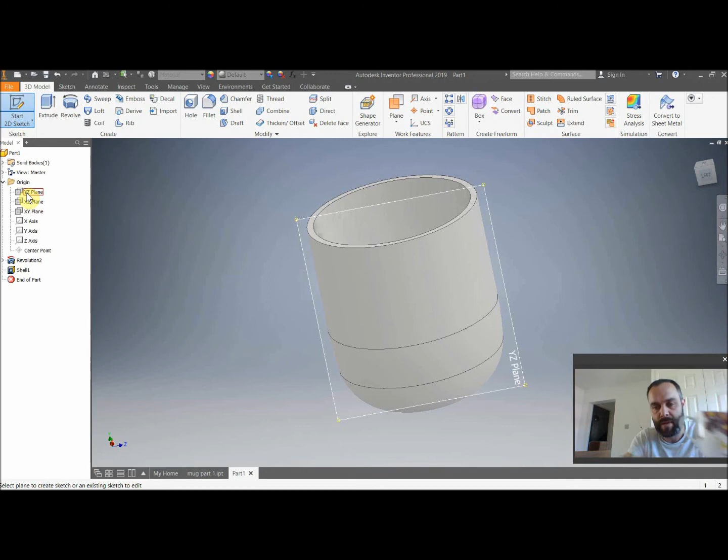Okay, so we're going to start a new 2D sketch, and we're going to produce the sketch on either the YZ plane there, which I'm going to use, or this XY plane over here. I'm going to use this one because I want my handle to be on this side, but obviously we could use the other plane to have the handle coming out here. It's purely what's easiest for you really, but this makes sense to me, so I'm going to choose that one there. Okay, now I'm working on that plane.

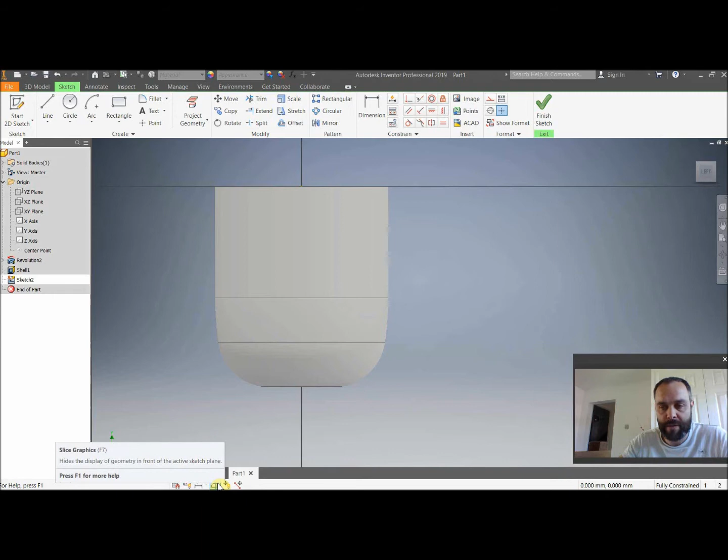Now I am actually in the middle of the product here. If you can see this as I zoom around, I'm actually working here, but because I'm looking at the front of the image, I can't actually see where I'm working. So it's quite useful at this point to choose this button here, Slice Graphics, that's the F7 key on your keyboard, and there we can see now I'm working on the inside of the product. So we can see this cross-sectional view where I'm working on the inside.

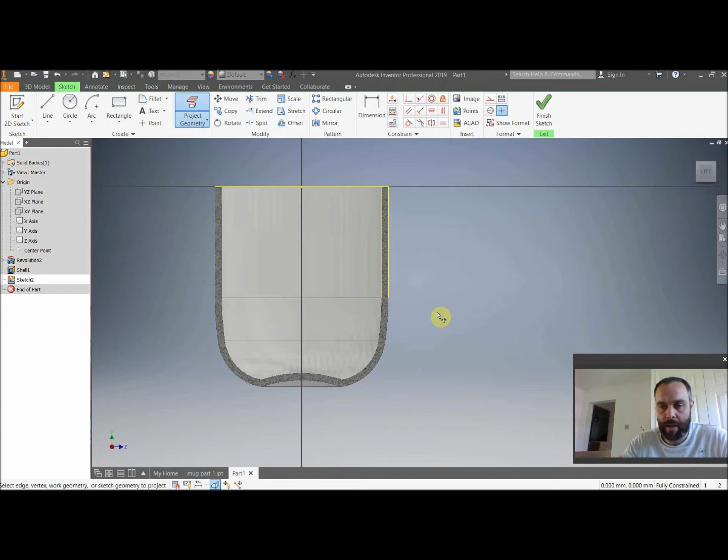Now the next thing I think is very useful is to project some geometry. So what I want to see is some of these control points used on the previous sketch, so that I know where I can work from to produce my next sketch. Now going back to my other sketch, this is what we're going to try and produce, this kind of path that we're going to sweep a profile along.

And you can see that this path from the view, it's set down from the top of the mug there. This is actually 15mm to get me the start of the path there. So that's the first thing I'm going to do, is just give myself a control point as to where that path kind of starts.

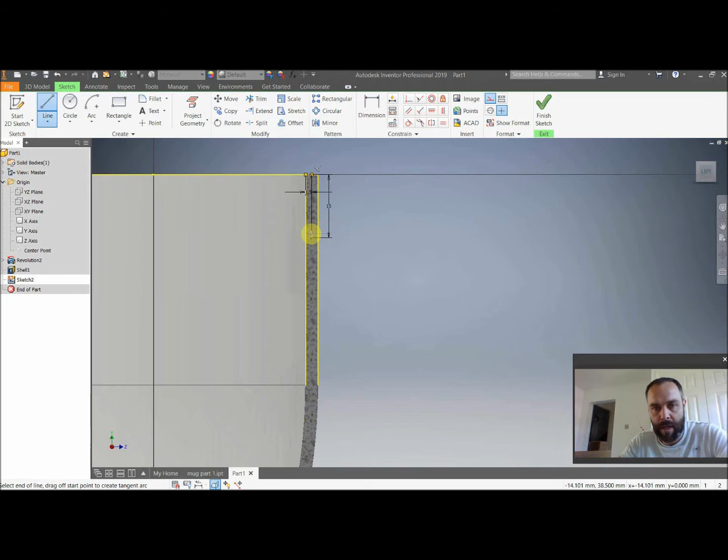Okay, so I've got my starting point here. I've got my cut edges, and I'm just going to get a construction line like this and just bring it down from the middle of that. In fact, it's not giving me the middle. I want it to be in the middle, so I'm going to make that 1.5mm first of all, coming across like this, and then coming down into the shape, as we said, 15mm. Okay, and that gives me the start of where my path is going to be for the actual handle of the mug.

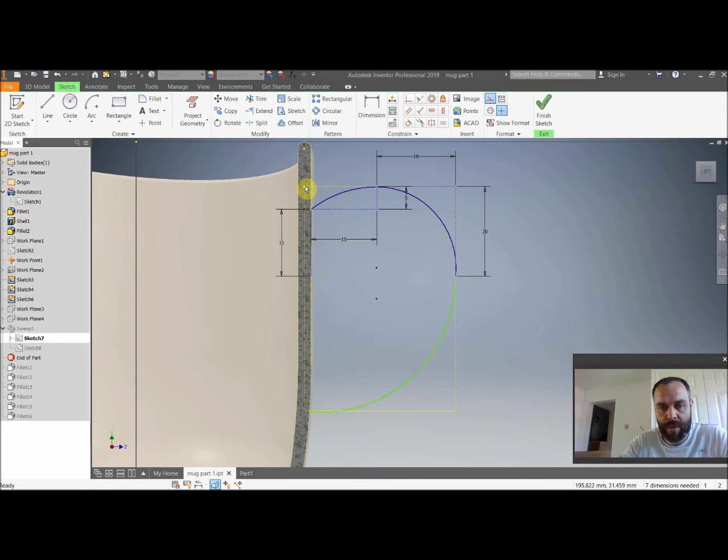Okay, so going back to my sketch as well, you can see on here I've got a box going around the outside. This box is actually slightly higher, so it's 5mm above the top part of the box, and we can see this box has a width. Let's just show you what this is. Okay, so we've got a width here of 34.5mm, and we have a height here of 50mm there.

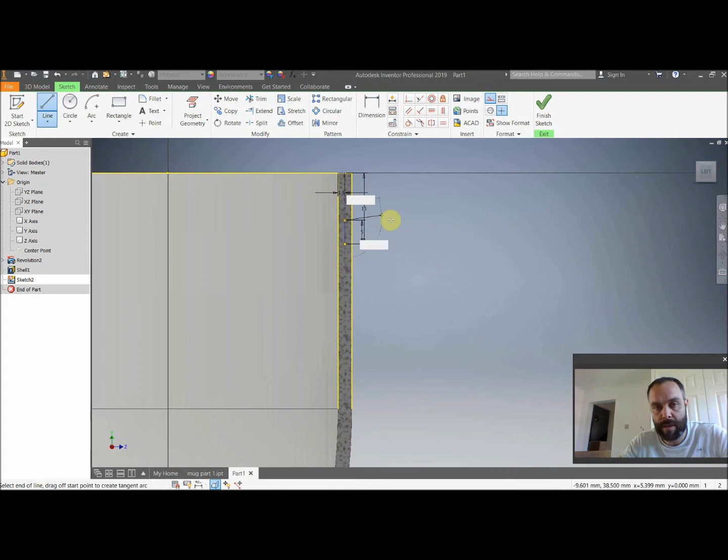So I'm going to just draw that in as a construction line as well, because it just gives me a place where I can see what the overall dimensions of the actual handle are going to be going around the outside. So we're going to draw a box 5mm up from that first point that I produced, and we're going to make it 34.5 by 50mm. Okay, so we'll just draw a line up there, making sure I'm on that 1.5mm like this, and then from that new control point I've got 5mm up, I'm going to draw this box. I'm going to make it 50mm high and 34.5mm in width.

Okay, so there we go, we've got that second control point made. Now what we've got here is a series of 1, 2, 3 curves, and then it joins back into the actual mug part, where these points will transition into the central part of the mug. So the first control point comes out 15mm there, and it goes up 5mm to the top part of the mug.

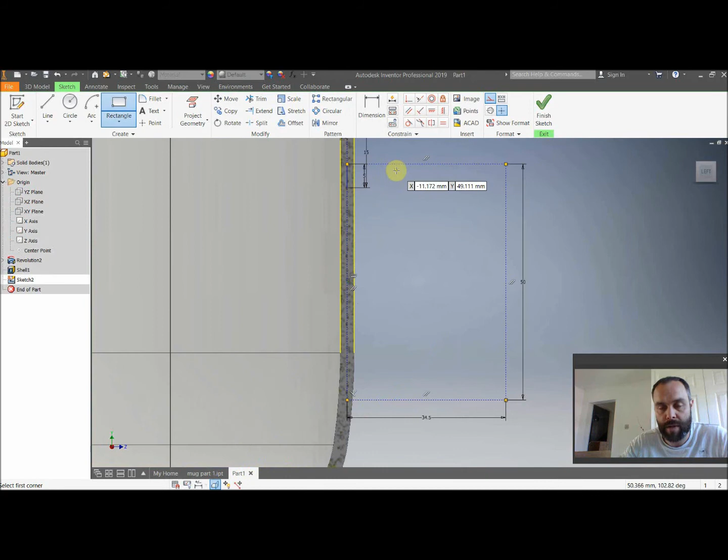So I'm going to just plot this in as well. We've got my starting point there, as we said. We'll zoom in a little bit, 5mm down. So I'm going to draw that part to come out 15mm from the edge of the mug there. In total from there, I suppose you could say it's 16.5, like this, making sure it's at 90 degrees as well, 16.5mm like that.

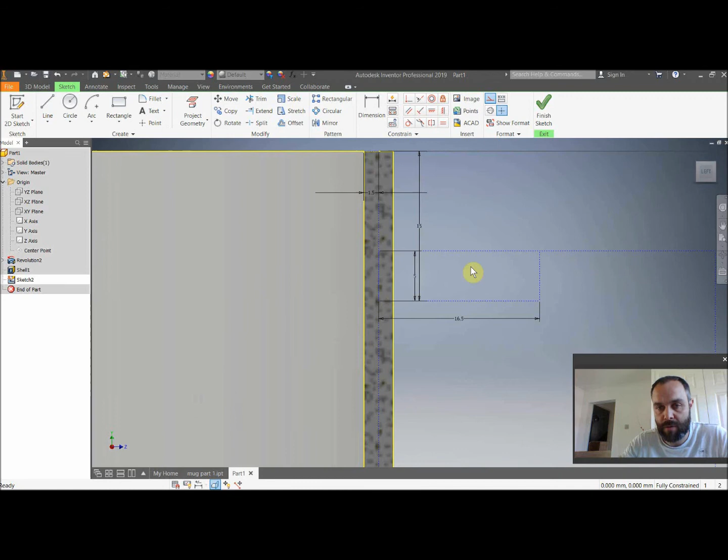And then I'm going to go up from that point, and where those two intersect, from the edge here all the way up to that point, this is where my curve's going to actually go. I'm going to make sure I've got a point here as well at 1.5, so I can see that's where the curve's going to be placed.

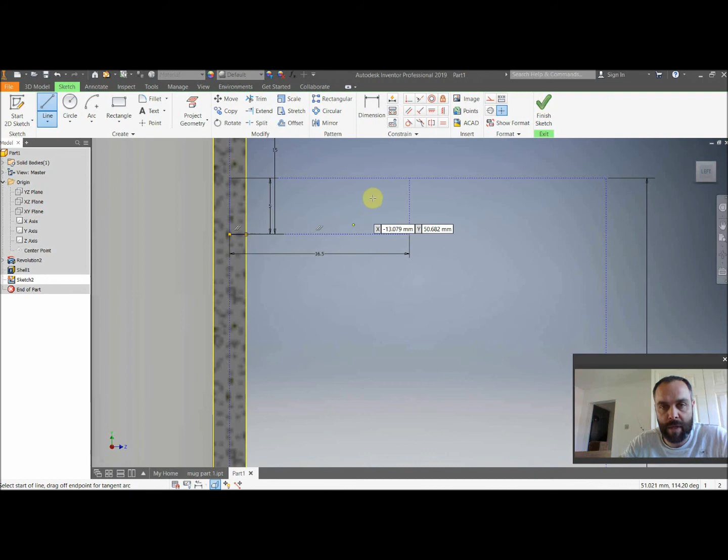Okay, and I think what I might do is start plotting in this path. So we're going to start with a solid line. I'm turning off the construction point there, and I'm going to produce that first line, 1.5mm, and then I want a curved line coming down from there, curving in and joining that part of the path. So we've got the first two parts of our path plotted in, these two lines there.

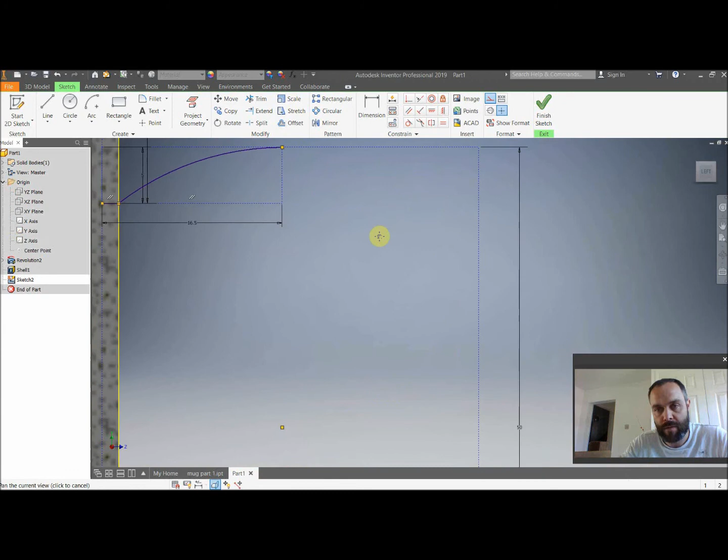Now our next part of the curve is going round here, and it's coming from that construction point to a point on the edge of the box, 20mm down. So once again, moving over a little bit, holding the middle mouse wheel to get myself around the shape, I'm going to create another construction line down 20mm from the top like this, and that gives me another construction point there.

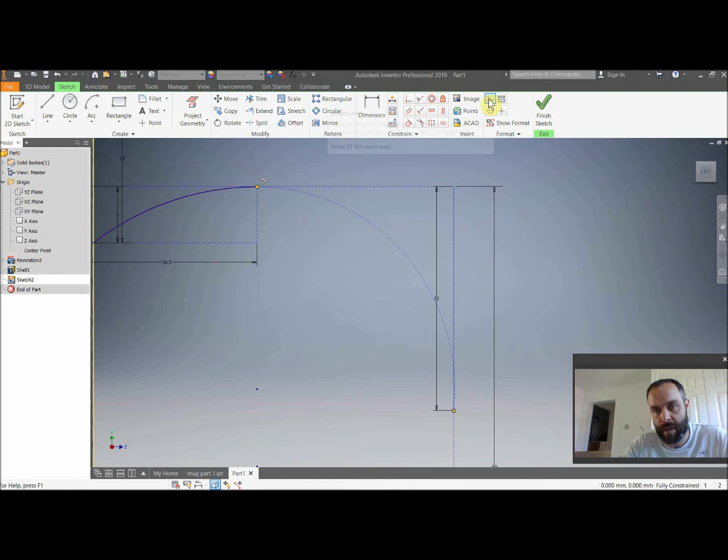What I'm then going to do is use my line tool, clicking and holding, and just dragging that round until I reach that construction point. I need to make sure this is a solid line. If you find that you draw something and accidentally got it clicked as a construction point, you can always toggle these on and off like that, and that creates my next part of the curve.

Now finally it comes around with a big looping curve to the bottom point where it transitions into the actual shape itself. So I'm going to try and do this as well.

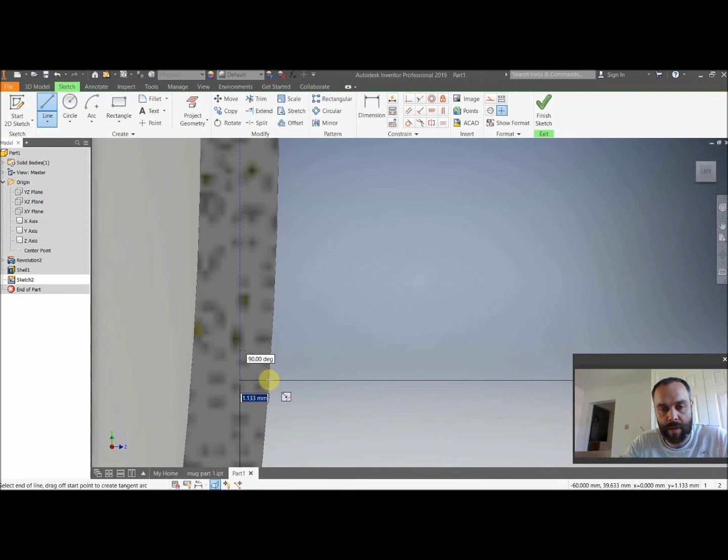At this point it's very important that you've got those construction points. So I'm going to go down to the bottom where the end of my product is, and I'm just going to draw myself a small line again till the edge of the product where they're meeting, like this, a little bit smaller this time because it's not quite 1.5 millimeters. And in between those two construction points that I've produced, I'm going to do that big looping curve again.

So I'm going to click and hold and then drag round. Oh, it's gone the wrong way. If you do find this happens, it's just a case of starting from a different point of the drawing. So this time I'm going to start here, click and hold, and then drag it up to the point where it joins the mug. So there we go.

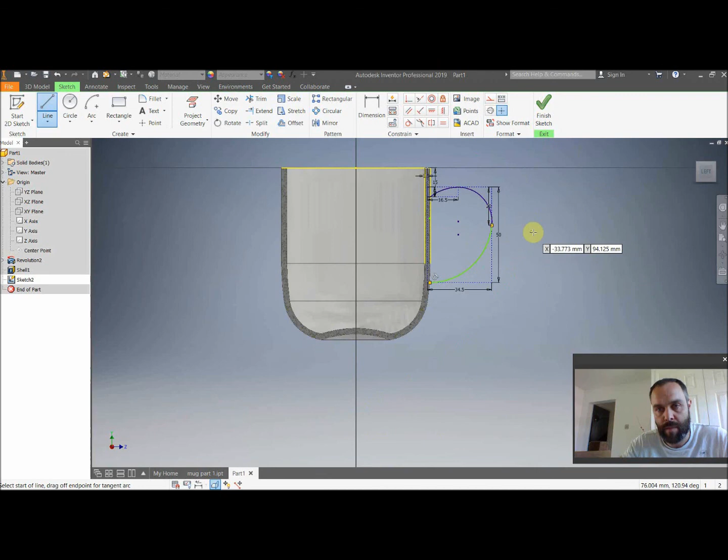We've got our profile drawing, and this profile is actually going to be used as a path that we're going to sweep a profile along. So we're going to create a rounded section like this and drag it around that shape in the next part of the video.